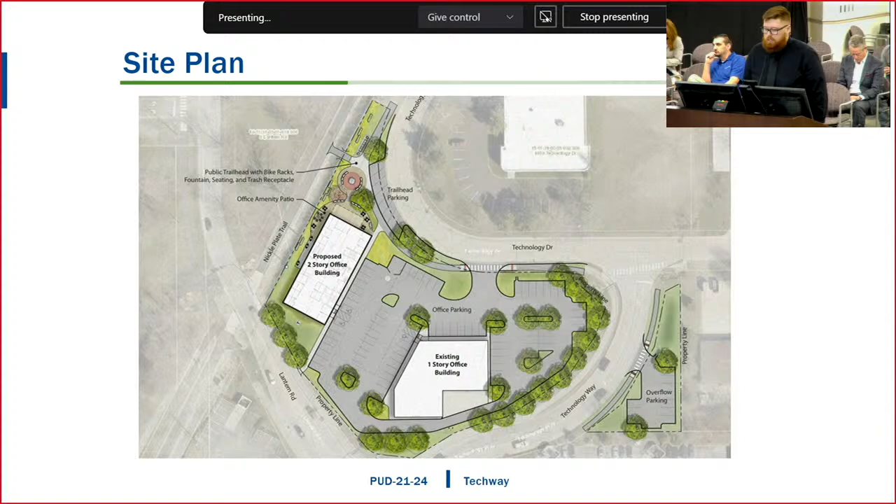The building that was approved has four-sided architecture, including brick veneer, brick header, and brick soldier cornice on all sides. The windows have either a metal eyebrow, cast stone headers, brick headers, and/or a metal sunshade. The base of the building is a cast stone water table. The windows are all either single or double wide storefront glazed warehouse style windows, and all HVAC units are screened on the roof with a metal panel RTU screen. The parapet also includes a stepped brick band. The project will include a trailhead location along the Nickel Plate Trail and signage prominently along Lantern Road.

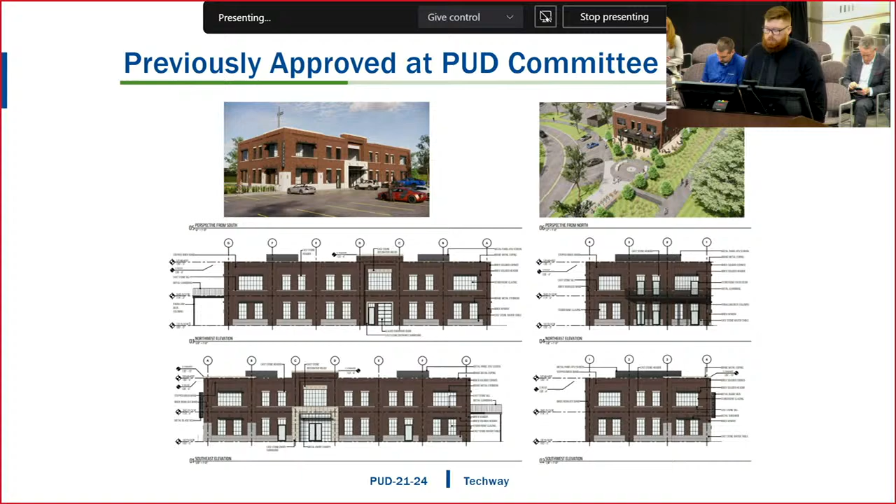Tonight the committee is reviewing the existing building on the site. The petitioner took feedback from the January meeting and worked with staff on new elevations. The petitioner would paint the existing brick a stone color similar to the proposed cast stone for the 14,000 square foot building. They will repair the existing EIFS and add some details in cornice, also painting the EIFS the same stone color — what appears white on the concept.

New brick, the same brick proposed for the two-story building, would be used around all the entrances and the featured window facing Lantern Commercial. They would also use metal canopies, headers, and coping similar to features on the other building. They would add an outdoor trellis patio facing Technology Way, with new rear doors and a blade sign on the corner, similar in nature to the existing building already approved.

This request meets all applicable zoning requirements of the Northeast Commerce Park and is fitting with the intent of the Certified Technology Park. Staff has worked with the petitioner through the TAC process and believes they will continue to work together. Staff recommends approval. The petitioner is also here to answer any questions.

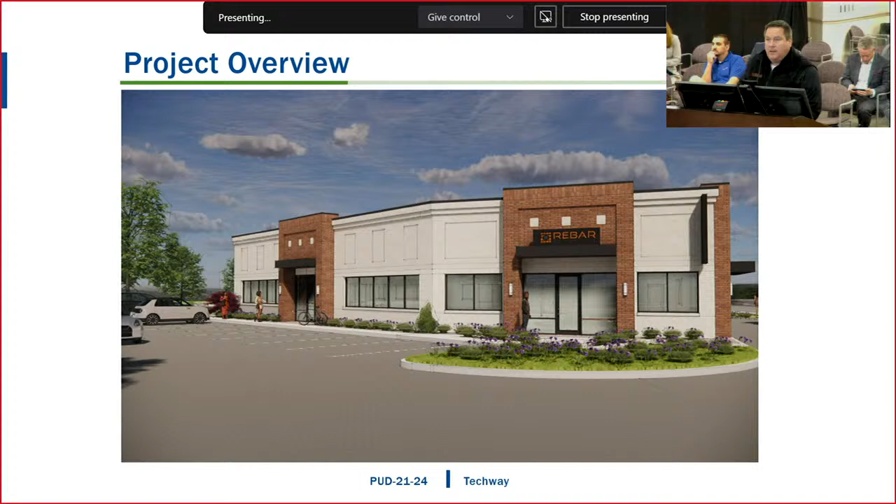Correct. So I just think it may add some - I don't know what the rest of the committee thinks, but I like maybe the duality of colors there that gives a little pop, because you're facing out to a prominent intersection now, with the modern age of building, and you're looking off that way. I just think it may give it a little extra, and hopefully the paint won't put you over budget, Shelby.

No, I agree. I think that'd be a good change.

Sean: I actually think it looks okay without the paint change. I think with the paint change it may get a little busy, so if there is a change, it's gonna have to be pretty minimal so it doesn't look very busy.

I do think this is much improved on what you had before. I think the one view that showed the back of the building facing Technology Way - the only comment I'd have there is it'd be nice if there was something done, because you've got such a long mass of that kind of limestone painted, which I think is block now, right?

Is that block currently, or is it half EIFS now? Brick, okay, then changes to EIFS.

If maybe you brought those metal canopies over those new punched openings, something like that, just to break up that side a little bit - because it is so long and flat along there, and it's pretty prominent now. You're talking about this section? Yeah, exactly.

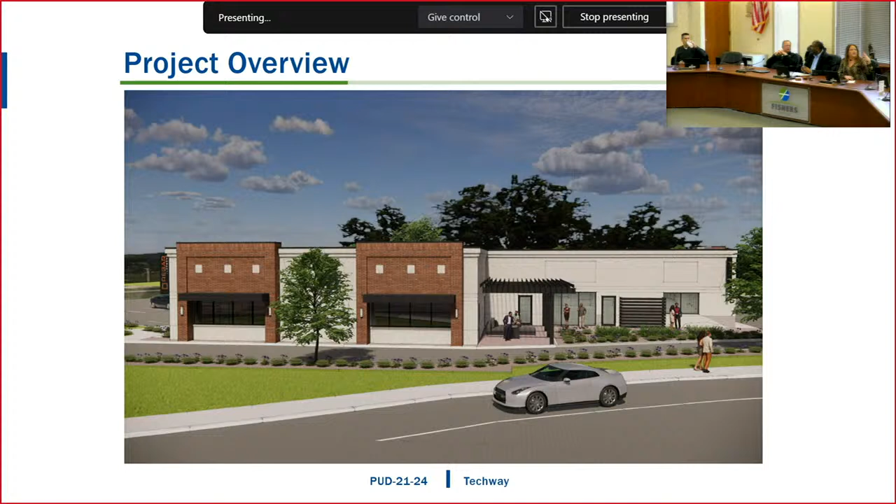Emily: I love that this committee has similar opinions. I'm sorry Pete, but I am gonna disagree with the change in color on the front. I actually like the clean look, but I definitely think that bringing that pergola, that canopy, over even further will really pull that back in together. I don't know how feasible it is.

I'm not in architecture or anything like that, but I do think that will really kind of bring it all together in the back. I like it a lot better.

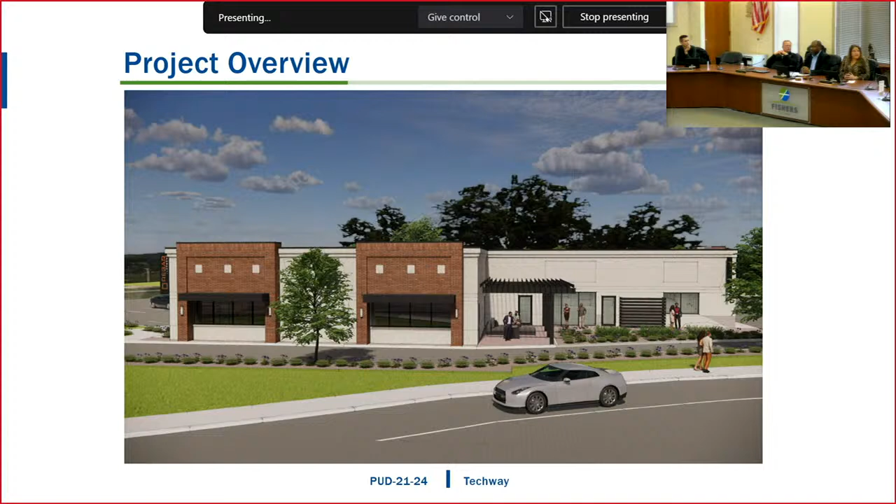I do think this is absolutely one of the first things you see coming into this tech park, right? So I would have liked to have seen something a little more significant, but I think it's much better than what we had before. So, yeah, that's my commentary. Thank you.

If there's no other questions, I would entertain a motion. I'm not married to making the color change, I just want whatever we think is gonna work. So I'll make a motion to approve with the stated items that Sean talked about on the rear of the building. I don't know if you can extend that canopy out any further.

I think you're gonna get encroachment on the landscape is what I saw. Emily, I think that would look good, but I think we're gonna encroach on some of that landscaping, so I think putting the overhangs, or canopies as you referred to them, maybe over there would be nice. So I'll make a motion to approve on that basis.

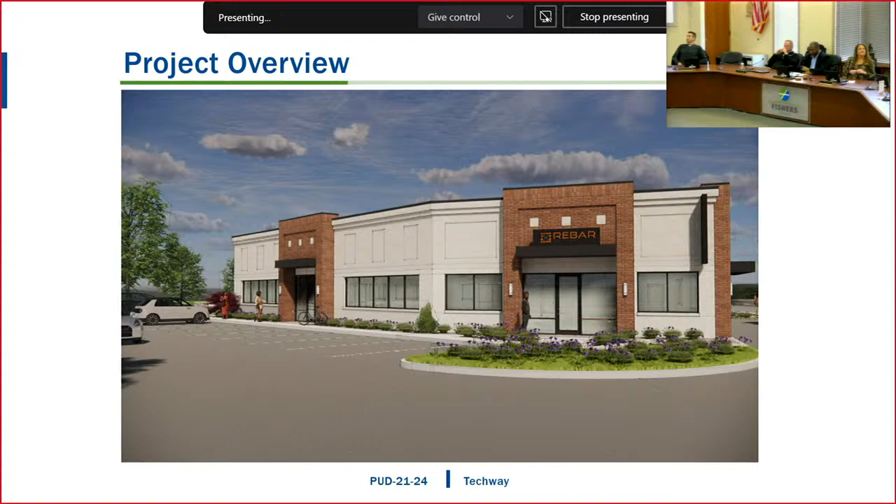Next matter on the agenda is PUD-21-25, the Courtyards of Fishers PUD. Faegre Drinker, on behalf of Epcon Communities, is requesting approval of the architecture and site design for a 50 single-family home development known as the Courtyards of Fishers PUD. The property is generally located northwest of the intersection of Southeastern Parkway and 113th Street.

And we have the staff here. I don't think we have Jonah, we have Ross again. Yes, Jonah is out today, so I'm taking his place for his two items. Thank you, President. Again, Ross Hillary, City of Fishers Planning and Zoning.

Before you tonight is PUD 21-25, which is the Courtyards of Fishers PUD. They are seeking architectural elevation and site design approval. Petitioner is Faegre Drinker on behalf of EPCON. The scope of the project is the approval of a site plan and architecture for an age-targeted single-family subdivision. The project includes 50 lots on 22 acres. The current zoning is R2, and the existing land use is currently vacant.

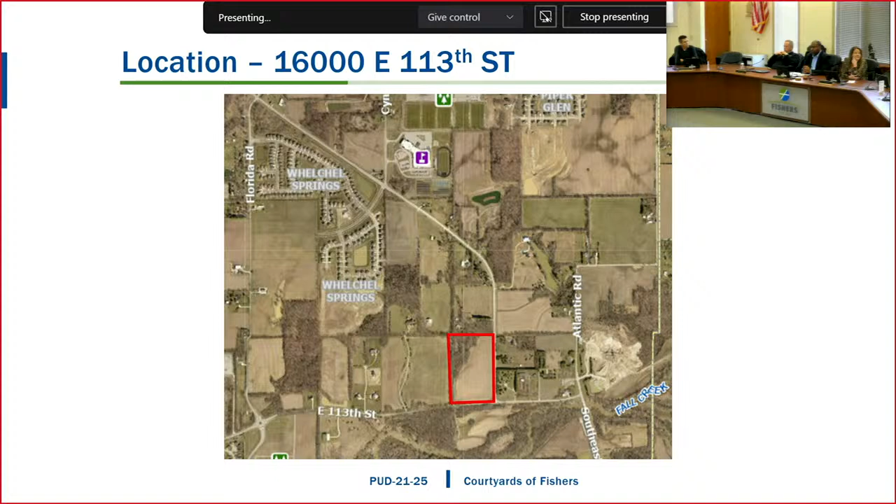The location is along East 113th Street and Southeastern Parkway at 16000 East 113th Street. That's the further location view.

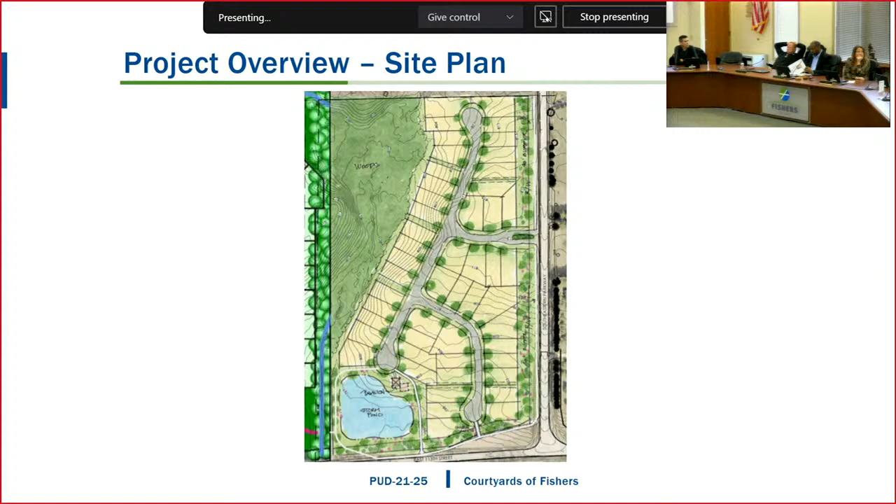Something really unique about this particular project is they are utilizing their side yards much more than their backyards. So the backyard along with the front yard will be treated more as common area, maintained by the HOA, but the residents will be utilizing their side yards.

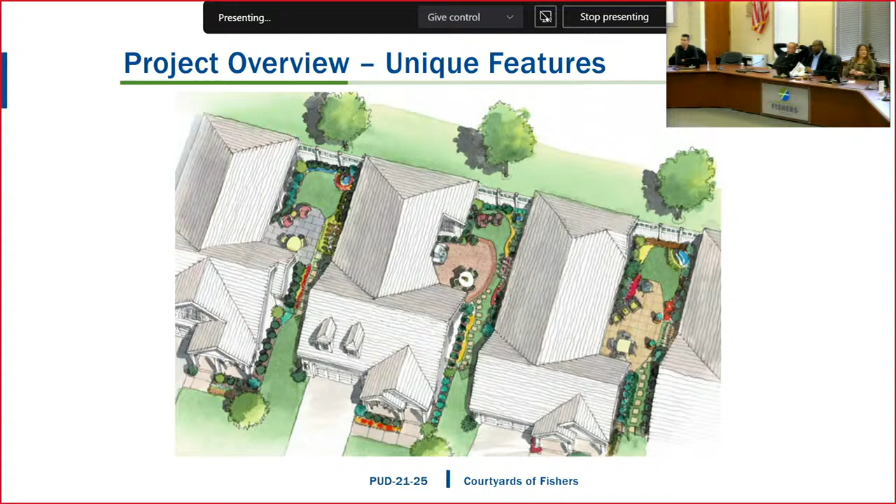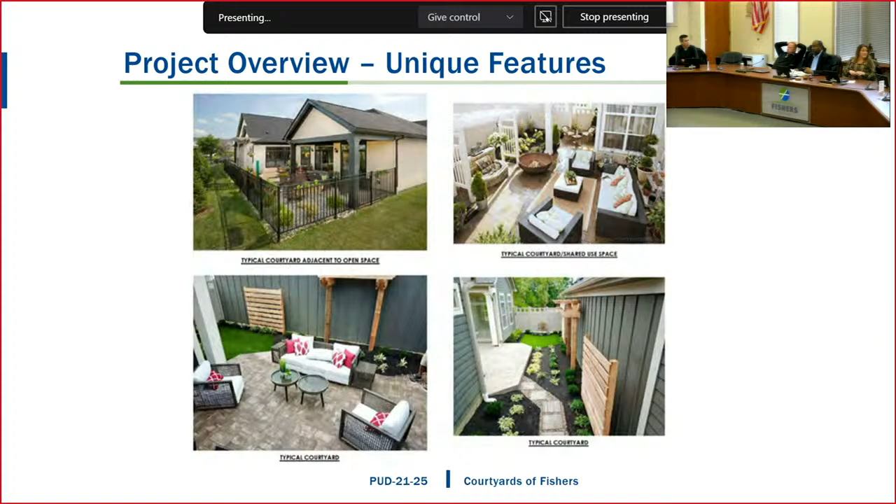Here are a couple of the unique features included in the PUD attachment. Again, you'll see a typical courtyard adjacent to open space and how they're utilizing those side yards, which is different than most subdivisions. We are approving some elevations tonight.

Staff does believe that these meet all minimum requirements set forth in the UDO as part of that PUD. The elevations tonight that you are approving are Promenade 3, which has 6 different elevations. The majority of the front porches are closer to the road than the garage, which is one standard we enjoyed. There's also the Provenance elevation, with 5 elevations, and Palazzo, with 8 elevations, all a little different but included under that same elevation.

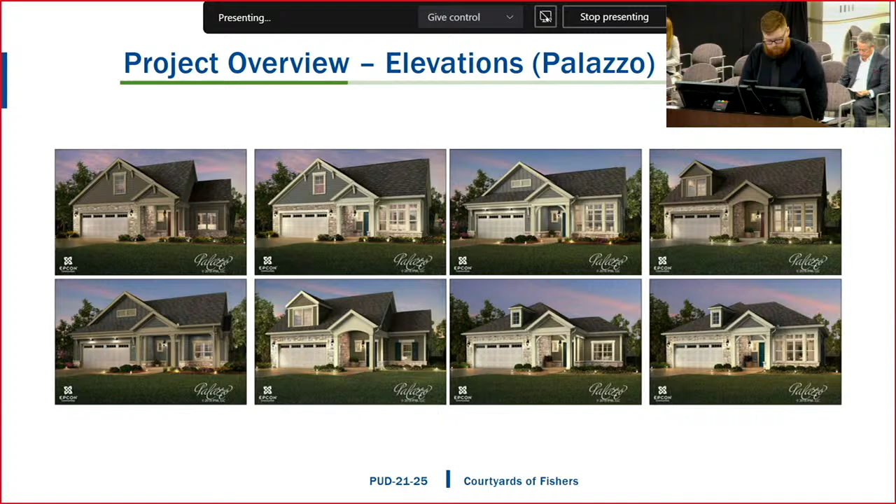Architectural features to note include reverse gable, varied cornice, corner molding, decorative entryways, multiple roof planes, decorative window casings, and roofline brackets. One thing I wanted to highlight again is the use of those side yards, which typically requires this to be a PUD and is not very easy to fit into our regular zoning code. With that, staff recommends approval of PUD 21-25 as presented. The petitioner is also here to answer any questions.

Thanks, Ross. We'll hear from the petitioner now.

For the record, my name is Steve Hardin. I'm a partner in the law firm of Faegre Drinker, resident here in the City of Fishers. I'm pleased to be representing EPCON Communities on this project. Brooks Longfellow is here with me as well, and he'll come to the podium in case you have any questions on the architecture.

As Ross mentioned, this is a little unusual for Fishers. We have a project that's been approved in Carmel, and there's one underway in Westfield as well. EPCON, unlike maybe some other developers or builders we've seen before, all they do is senior housing—it's all age restricted. I'll let Brooks introduce a little bit about the background, how many years in business, how they focus solely on the senior market, and why this is called the Courtyards of Fishers, because of the courtyard plan, which is kind of a unique aspect of it. So Brooks, maybe just take a few minutes, explain the concept, and then we'll open it up for any questions on the architecture.

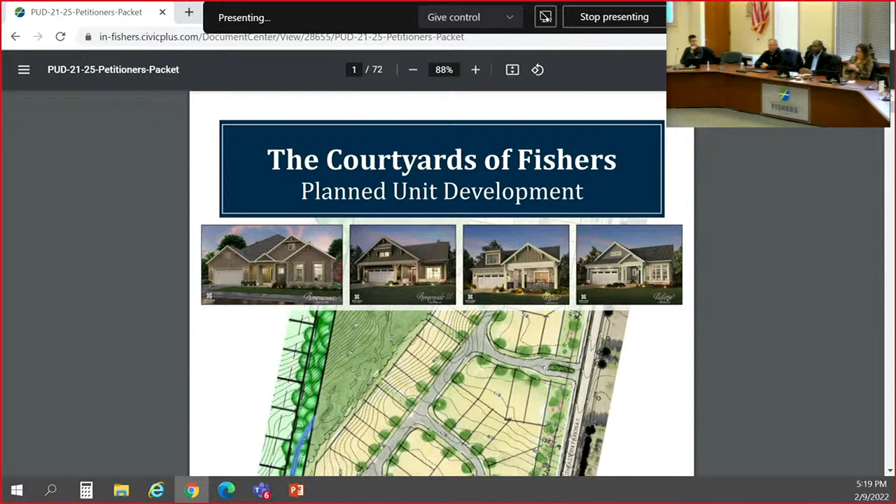The only elevation I have a question with was the first grouping of elevations - you're showing the garage doors with no windows. I'm big on some sort of decorative garage door, putting windows in there. You have them in all the rest of them. I don't think it would be a big ask to put them there or do something to give me some detail, just not a flat panel garage door in that first group.

We do offer an option to each one of our clients on every single floor plan and elevation to add windows to that garage door. I'm a big fan of the windows or something on the garage door. We can include it if you'd like. I just think it gives a decent look to the front rather than a big flat white garage, in my opinion.

By the way, you'd asked about the southeastern landscaping. We meant to talk about that more at the Plan Commission meeting tonight. We did have a meeting with the neighbors, inviting anybody who wanted to talk about the project. A couple wanted to, including the neighbor right across the street, Mr. Sunderman, you might remember him from last time. They reviewed everything, and we asked them to tell us if there was anything they wanted to change. They had some requested changes for the landscaping, so we red-lined it in the PUD ordinance and made the change they asked for. They're appreciative of that.

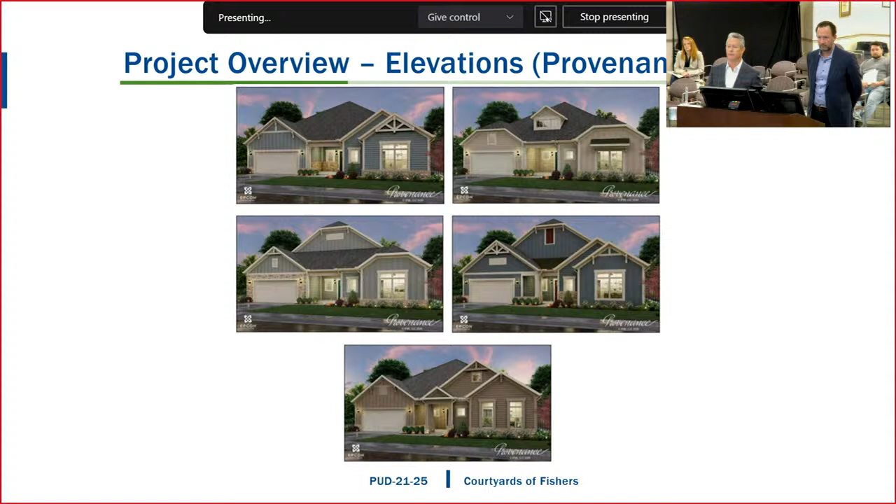Awesome, thank you. Any other comments from board members?

I just have one quick comment. I am so thankful that you guys are filling a need. And that's all I'm gonna say.

Thank you. I have a question, just because I haven't experienced one of these in person. A couple of the photos showed kind of the side yard concept, which I think is a great idea. Is there uniformity to the fences from lot to lot, so that mine is the same as my neighbor's, so there's consistency? I don't want a white picket fence next to a wrought iron fence. I assume it's consistent? I can pull up whichever exhibit you'd like.

This one? Will this magically change, or—oh, wait a minute. Yeah, there it goes, there it is. It does magically change.

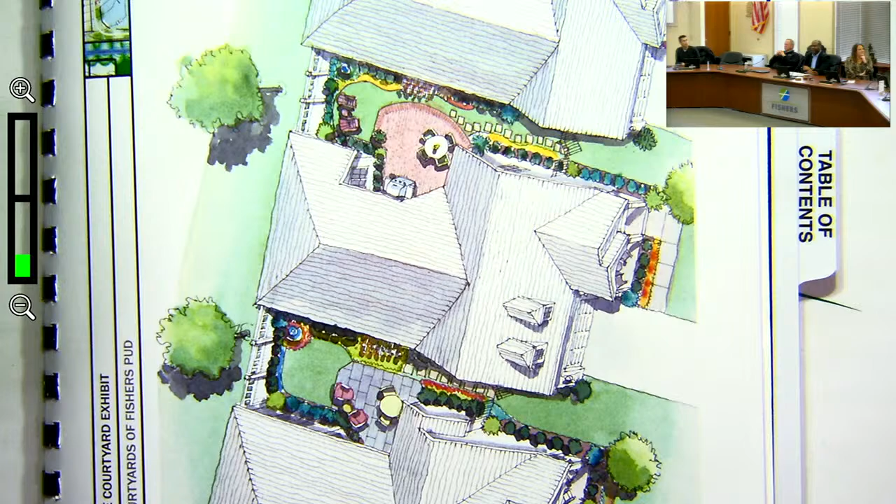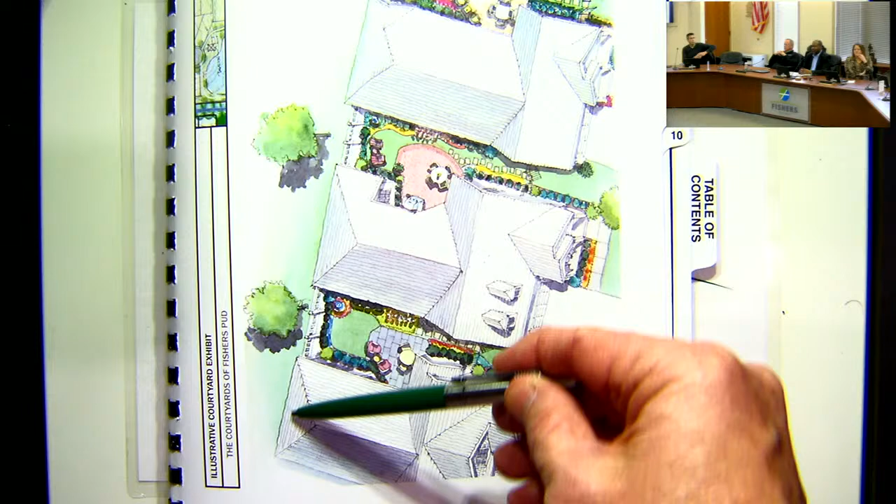One of the things we do is something a little unique in how we set the homes on the lot. If everything was pushed to the front setback, the backs of the homes would all vary. But if you look at this illustration, all the rears are lined up. We put everything at the rear setback so that all the rear facades are in a line, and those fences can connect uniformly across the back—the same fence across the entire side.

And then the other question I had is, between the lots—for example, the one I'm looking at in the middle—my side yard would be to the right, if I'm looking correctly. So if you're on the home that Steve had his pen on, your side yard is to the right. And then the one to the right of that, what is the configuration of that floor plan relative to windows and things like that, looking out at that space?

Great question. There are windows on the left side of the home in this illustration, but they are all transoms, held up high. So they let natural light into the individual's home, but they aren't in a spot where they can see out into the neighbor's outdoor space. It's really kind of two-sided privacy—if I'm sitting outside, I don't want someone seeing me, but if I'm inside, I also don't want someone looking into my house. Just wanted to make sure that was addressed.

Good job. I guess I have one question out of curiosity. I like the concept that residents can walk from their garage into their house with no step up. Curious regarding the bathrooms, in terms of the showers—there's no step up or bathtub. Any drainage or water issues or flowage regarding that?

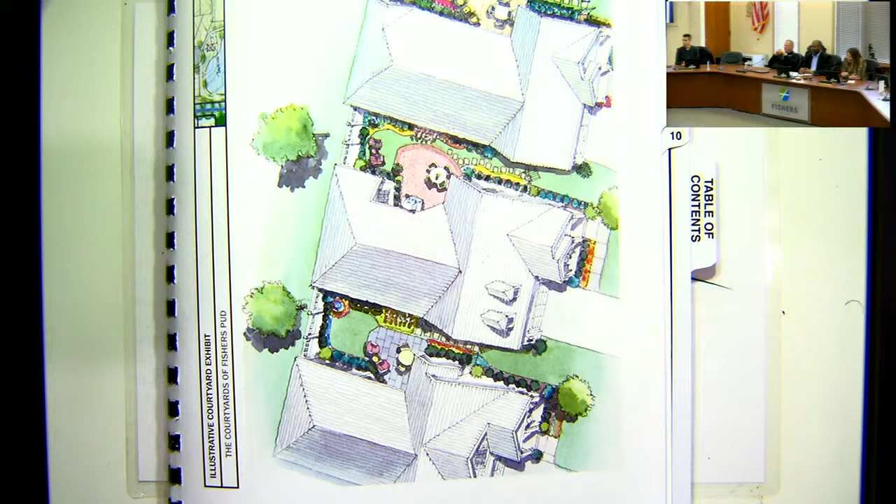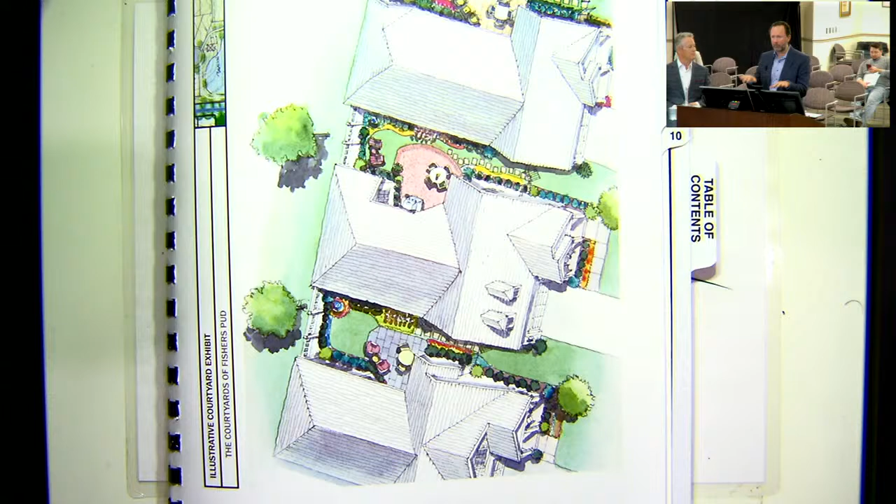No. What we do is drop the shower, so the floor of the shower is actually recessed from the level of the floor of the rest of the home, and all the plumbing's underneath the slab. So there aren't any drainage issues there—everything's sloped appropriately to that center drain. Thank you.

I would entertain a motion. I'll make a motion to approve with the garage door window addition. We have a motion. Do we have a second? We have a second. Roll call, please.

Mr. Stevenson? Yes. Ms. Bowman? Yes. Mr. Curran? Yes. Mr. Peterson? Yes. The motion carries. Thank you. Thank you very much.

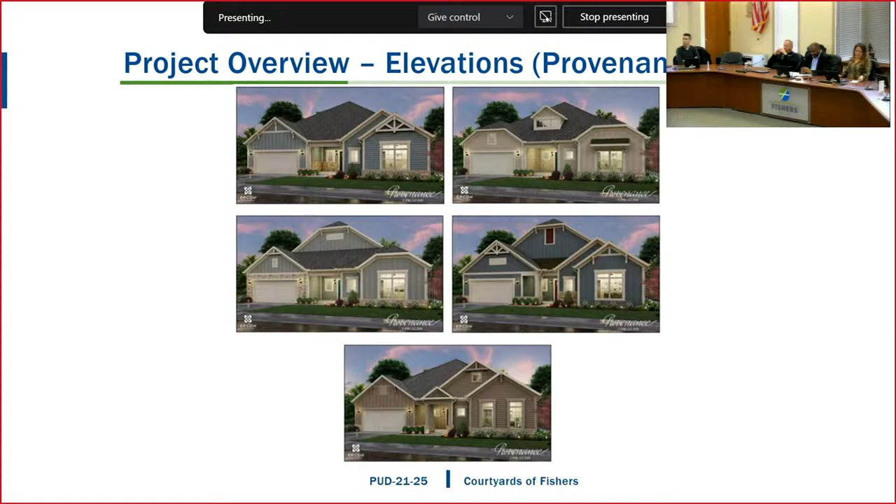Next item on the agenda is PUD-21-26, Anytime Fitness at Geist Crossing. Seth Nycum with Roger Ward Engineering is requesting approval of the architecture and site design of a one-lot, three-unit commercial tenant development within the Southeast Fishers PUD. The property is generally located east of Olio Road and north of 96th Street. And we have Ross Hillary once again with the staff to present for us.

Thank you. Again, PUD 21-26, Ross Hillary, City of Fishers. Before you tonight is Anytime Fitness, seeking architectural and site design improvements. The petitioner is with Roger Ward Engineering, looking at a 3-tenant commercial space, approximately 0.86 acres. Currently PUD-M, Southeast Fishers, located near the intersection of 96 and Olio.

Here is an overview of the site plan. You'll see here how the building steps back. It is connecting both Visionworks Geist Crossing and a Cooper Tire structure right there, so it would be connecting these two buildings. Parking would go along both sides of that existing drive, and you'll see the building here on that site plan. Again, here's another rendering of that overall site plan.

Here's the elevations of the building. Elevations include fiber cement trim, natural stone, limestone, black storefront windows. They've also shown where signage would be located, but it's not part of the approval tonight. Also signage for the other two tenants located there. You'll see building elevations on all sides, including the masonry and Hardie plank.

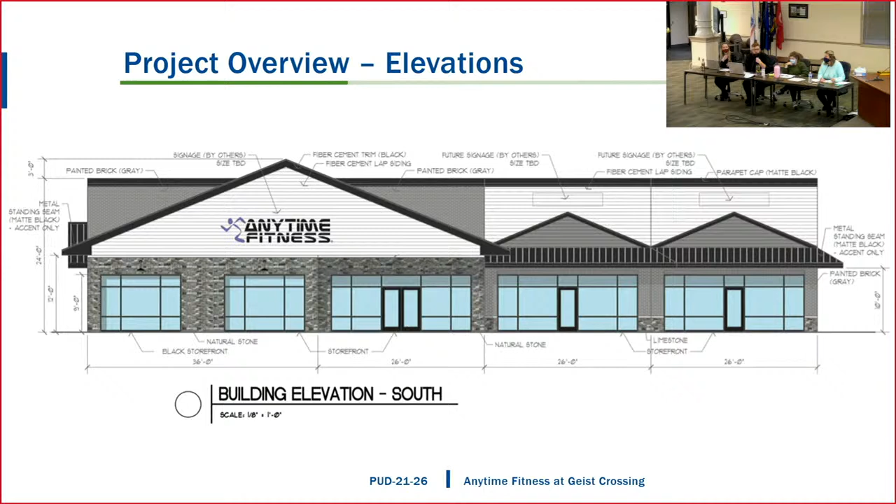Yeah, I would agree, and not to say it should look like another building, because I hate when people tell me that. But I think an example of a building that at least got a little bit closer to that in trying to match their adjacent buildings was the buildings along 116th Street between Hoosier Road and Brooks School, on the north side of the street. There's a couple—I think there's single tenant buildings that are much more residential in character, and then there's one that is multi-tenant.

Yep, well, I don't think that building is great, but I think it at least blends in with the other buildings a little bit better from a style standpoint. And that has a similar color—yes, it does—architecturally, a similar color palette, I think, to this building.

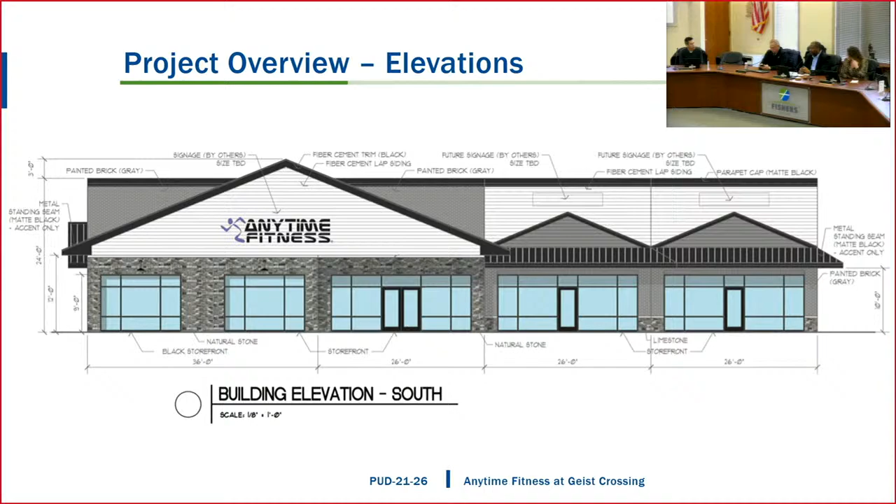Yeah, pull up the site plan again, if you would. Can we get to the site plan again? This is around the corner from my house.

So we're looking at the Neil Tire and Auto—that's the Cooper Tire, I think we're talking about, right? Isn't it called Neil Tire and Service, I think? Yes, Cooper Tire, right? Yeah.

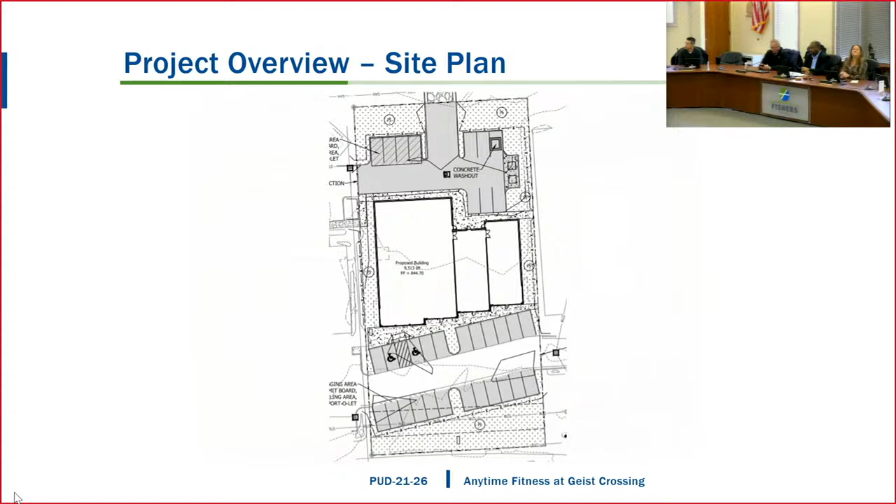So then to the west of that would be the vet—I got that right? It's north of this building, the vet clinic, but right west—oh, I see, west, north of that—I got it, yep. So directly to the west then is, what is that building there?

Visionworks? Visionworks, yeah. So it's not really adjacent, I mean there's a Global Self Storage unit just to the east, which in my opinion has always looked atrocious, but it's along that southern border. I don't really have any issues with the architecture there. I'm looking at it right now on Google Maps, and you've got a big retention pond, you've got the vet, you've got a parking lot.

I get what you guys are saying, and certainly along 116th Street, we were far closer adjacency to residential, where we were getting light questions and trash collection questions that we're not gonna get here. We're just not gonna get it. Just because everything around there, you've got a strip mall out in front, the Shell station, the Vision Center, and the tire shop. Right now, it's a dirt lot.

That whole section down there, I actually think it may add some character to get something put in there, quite frankly, and make it look better than what it is now, just from a sheer streetscape as you're going through. Obviously, there's a landscape plan in the parking lots, like we always do, and the lights are there too for the parking lots that we require. So I'm not necessarily having an issue with the location, and it is literally around the corner from my house.

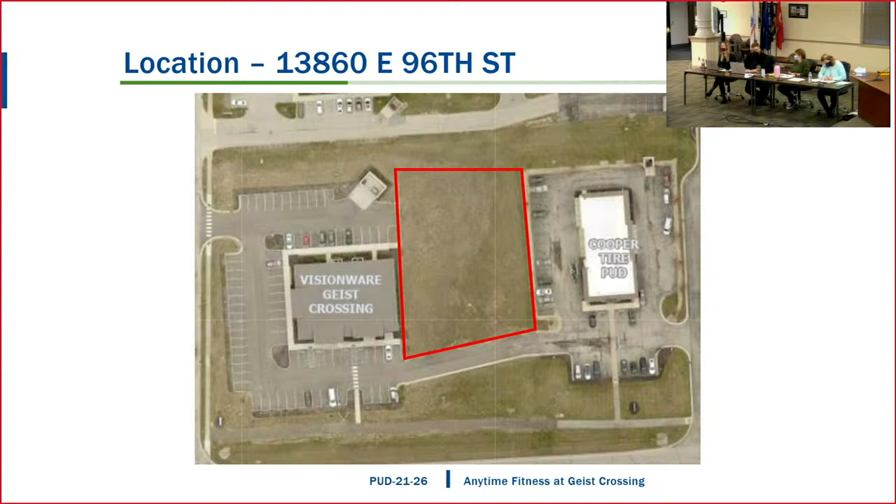I move to carry this to the next meeting. Okay, to continue it? Yes. That's the motion on the table? I'll second that motion. We have a motion and a second. Roll call, please. Mr. Peterson? Yes. Mr. Curran? Yes. Ms. Bowman? Yes.

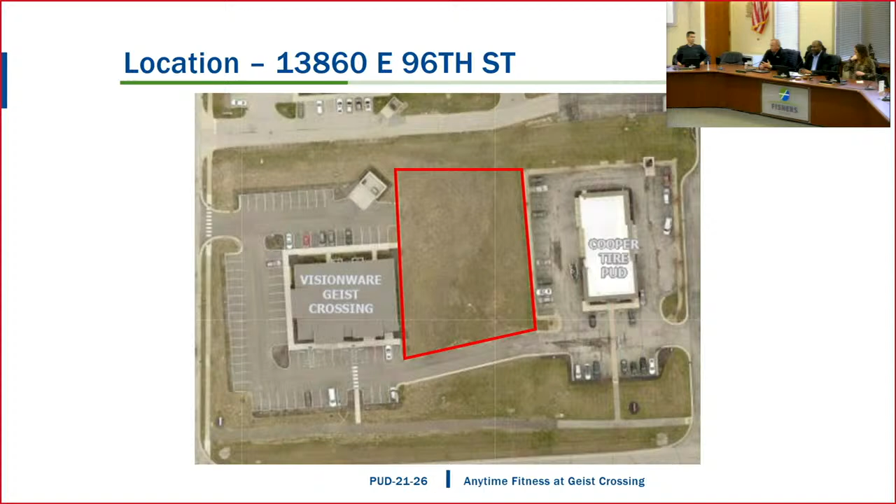Mr. Stevenson? Yes. So, but I want to make sure I give the petitioner at least some vision here. And I am not an architect, I just work for an architect, okay? So I understand budget questions that you have, and I understand what's going on in the marketplace. I'm not really sure how you take essentially what is an industrial building as a fitness center, because that's what they are, okay? They're boxes that they put equipment in, and try to make that backside more architecturally nuanced so that it's residential in flavor. Are we talking about adding the same pitch gable roof which we see up front and doing that out back? Is that what we're requesting? I'm not really sure what that does to your budget. I'm sure it crushes it, but I want to at least give some sort of direction. We're just talking about different articulations. Are we talking about putting a canopy out? I don't know. So I want to try to give them at least something that they can go back to their client with and say, ideas that may cost them a little bit more money but won't kill them. I understand the concerns that we have for sure. I'm just not really sure the solution if we have any here to help.

So, anybody have ideas? My architect friend over here, would say, architect has some opinions, but I have an opinion too, sure. I think also maybe some renderings that show a little bit more of the 3D elements of the building will help. It's very tonal, which is good because the whole building is tonal, but a different color, a different material, a different something to give it just a bit more interest back there. But I think Sean's opinions are going to be stronger than mine.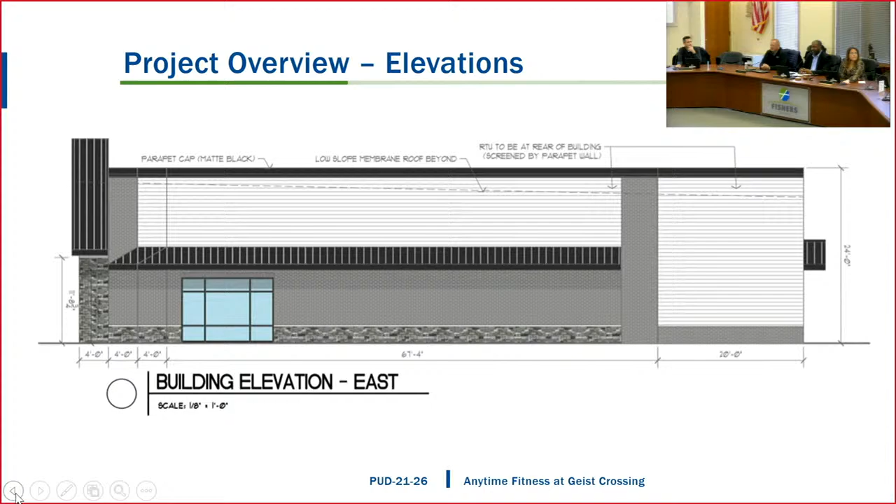The sides are not the concern. Sides and front are mostly acceptable, correct? It's just really that north elevation that's the main concern. Correct. Yes, but this updated west elevation, I'm okay with that one. The one we got originally, I was not okay with.

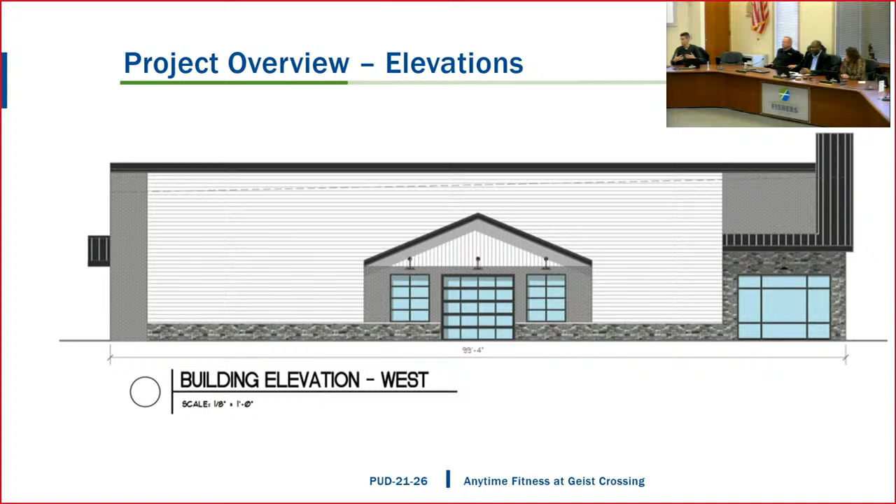I think it looks like a box that has stuff added to it, and I would expand on that, that's all. That elevation to me looks very flat, and it looks like a canopy's been tacked onto it. It doesn't read three-dimensional to me. So if it is three-dimensional along there, that's great, but it doesn't read that way. It reads like a flat plane with a canopy added in order to meet the requirements of PUD.

Yeah, Revit will take care of that.

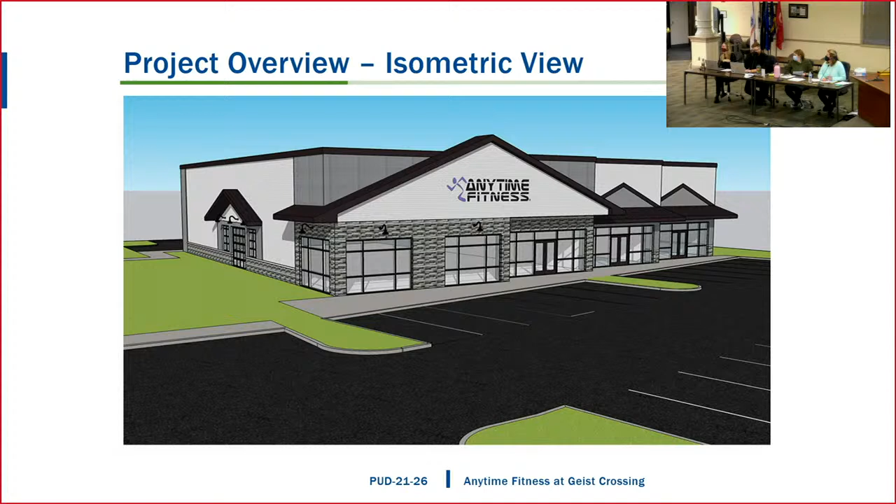Staff can share with you some other multi-tenant buildings that Sean was referencing, on 116th Street, just to give you an idea of that. That would be something great, that would be acceptable. Thank you, thank you very much.

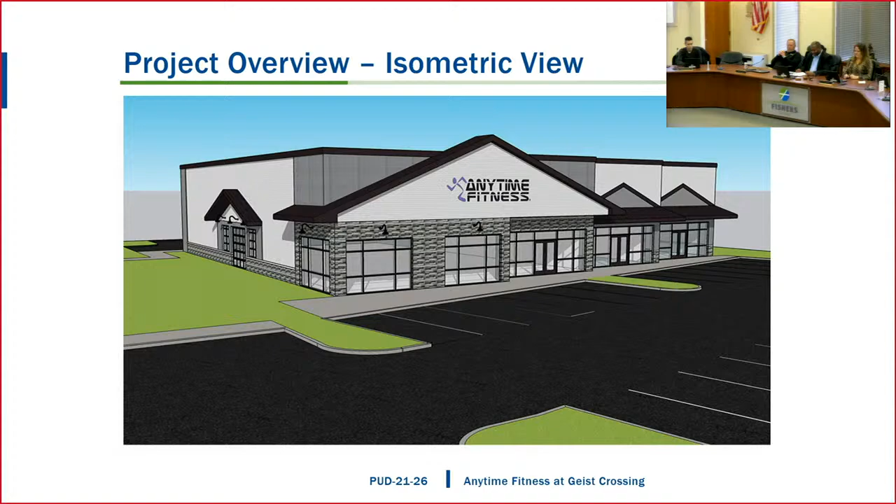PUD-22-1, Alderman Auto, Seth Nykum of Roger Ward Engineering is requesting PUD committee approval for a commercial building for car servicing, 6,600 square feet at Alderman Auto. The current zoning is PUD-C, Fishers Trade Center. The site is located southwest of 141st Street and State Road 37.

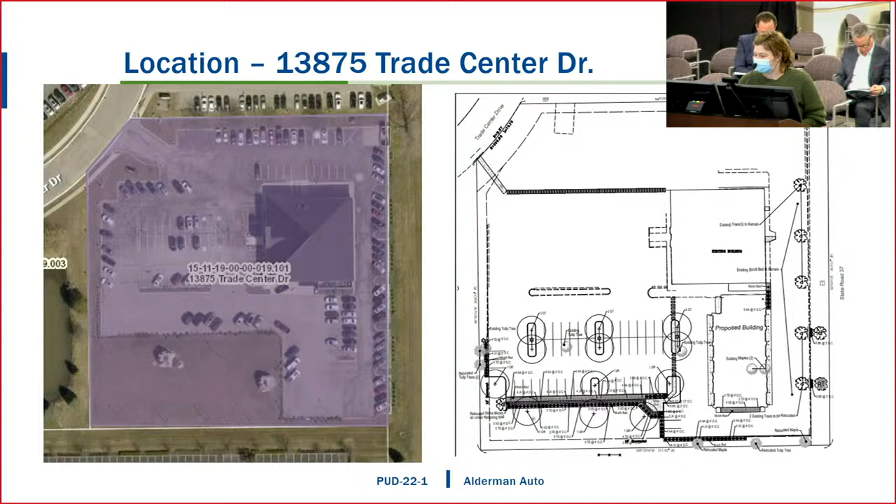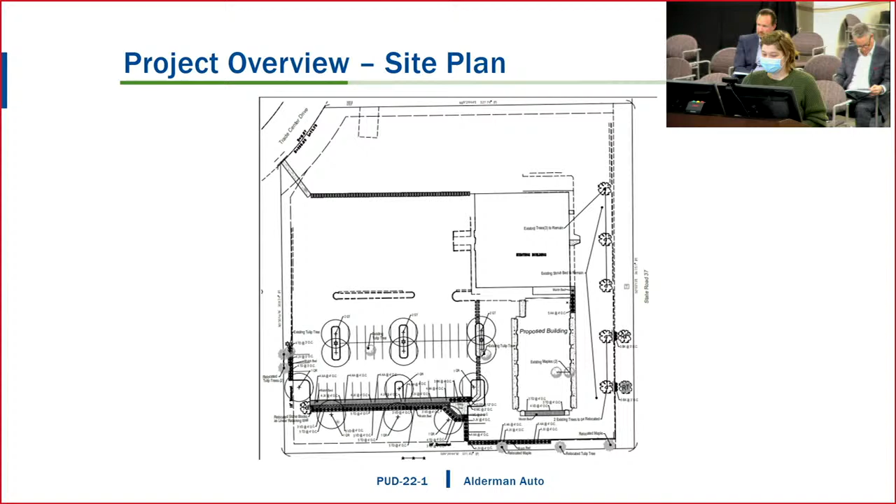Once again, here is the site plan. The new parking lot will be screened with landscaping, and the additional parking does meet the UDO requirements.

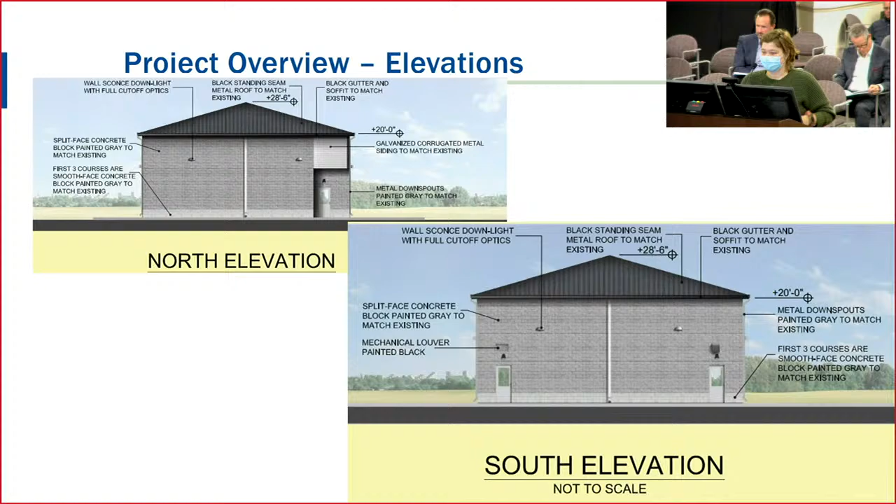Here are the elevations of the proposed structure, this is the north and south elevation. As you can see, the brick is a similar or the same color to the primary structure, with a subtle difference in the coloration there. The north and south elevation is what is facing the primary structure and the property to the south, not what is facing the public right-of-way.

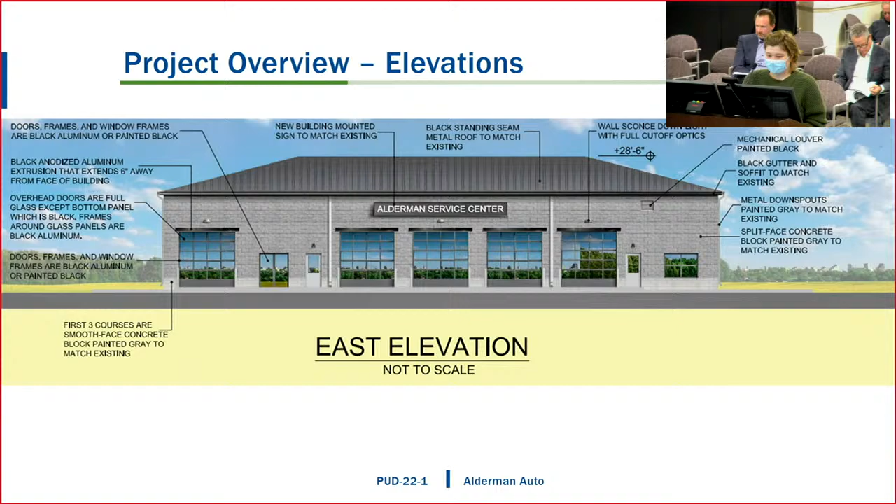Staff has asked if the overhangs could be extended to 12 inches to meet the UDO requirements for modulation. Here's the west elevation. As you can see, the new Alderman service sign does have that corrugated metal in order to match the primary structure, so it'll fit well with what is existing. This also has the aluminum awnings and the glass doors.

Staff does recommend approval of the PUD. We have had suggestions for the following for the north and south elevations: the addition of a paint stripe or material change along the north and south elevation. We have also requested that the aluminum awnings be extended to 12 inches instead of 6 inches as proposed to meet the requirements of the architectural guidelines referring to modulation in the UDO. We have also potentially suggested working with a local artist to place a mural on the north or south elevation, similar to a Jiffy Lube style, instead of a paint stripe.

Thank you. We'll hear from the petitioner.

Good evening, everyone. I'm Graham Marshall with Roger Ward Engineering. I'm representing Mike Belay from Belay Architects as well as Brittany Construction. I don't have anything to add, but I'm here to answer any questions you might have. I will note I am the engineer on this project and not the architect, so I'm not sure I'll be able to answer all of them, but I'll do my best.

Thank you. Board members? Again, I think it's a good use for it. I love the metal roof, so I don't have any architecture questions for you. I also appreciate the fact that we're walling up along the parking areas on 37.

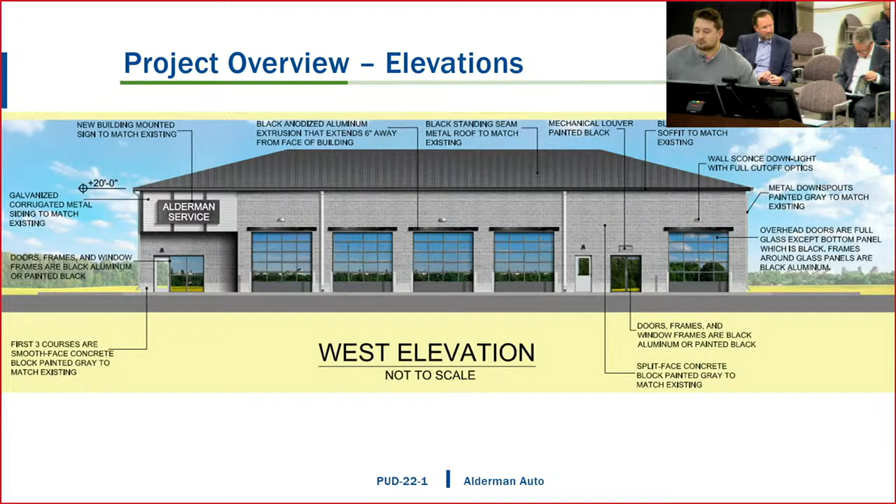I think the staff comments to add those 3 items, if I counted them right. Yeah, 1, 2, they're 3. Just suggestions really for you guys, so I would say we're not recommending all of those, but maybe the first 2 — the addition of a paint stripe and then the aluminum awnings, just having those project out a little bit. I think all those are really good suggestions, quite frankly.

I like the mural thing, the Jiffy Lube mural thing on either side. I think that looks great, particularly along 37, to differentiate ourselves from our neighbors to the south and north. All in all, I think it's a pretty good use for this particular project, along with those comments from staff. I personally am an artist working in Indianapolis, and I think that kind of opportunity would actually be great, and I think you would get a really good response. The owner would get a really good response if they were to pursue that, so I definitely think that's something they should do. Thank you.

I have one question, if you could bring up the site plan. So there's garage doors on both east and west, correct? Is there a drive along the east side as well, or is it a little hard to tell from the site plan? Yes, there's a showroom. There's parking spaces for the cars that are being sold as well as a drive on.

Okay, perfect. I do agree. I think this is a great opportunity to reimagine the site, obviously, when Ben and Ari's went out. And I think that orienting this on the east side of the property with the State Road 37 work being done, and focusing more of the vehicle orientation to the west, is great.

No other comments. I do agree the 12-inch projection of the awnings would be a great idea. And the mural, I guess I would prefer the mural over a stripe. And I would suggest it go on the south side, not the north side, because it looks like you're pretty close to the building to the north, so I don't think it's going to get a whole lot of visibility to the north. So if that is going to be done, I think it should go on the south side.

Nothing else. Thanks, John. Entertain a motion? I'll make a motion to approve with the staff recommendations, and I like Sean's idea — mural to the south, stripe to the north. I like the succinctness. We have a motion. Do we have a second? I'll second. We have a motion and a second. Roll call, please.

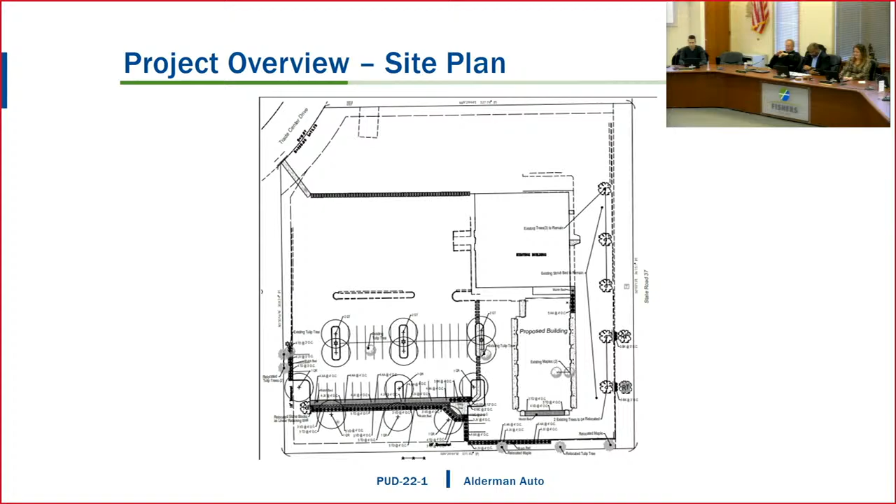Dr. Mike Timko of Kimley Horn and Associates is the project engineer, and we have Bree King once again for the staff to present. Thank you.

We are requesting approval of elevations and site design for the Silver Collection at Saxony, which is a 4-apartment building complex, 362 total units, detached garages, mailroom, and a clubhouse. They have already obtained Saxony board approval. You can see this will be located in Saxony.

Here's the site plan. There is one minor change since this was first put in the staff report: the proposed garages directly on the north end will be the garages with the higher architecture. I'll bring this up later when I have the elevations, but it's important to note that those higher visibility garages will have the elevated architecture.

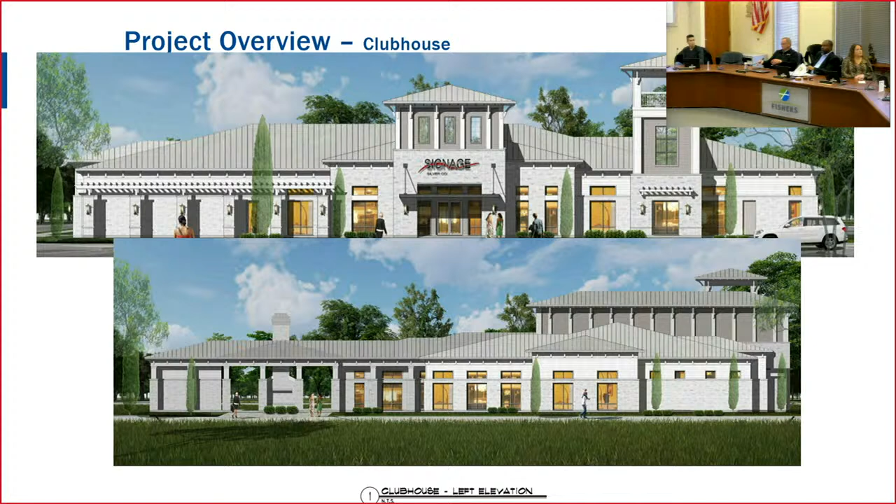This is the clubhouse. I just want to point out that signage will require a sign permit and will be reviewed to the PUD and UDO standards at that time. There is quite a bit of roofline modulation, as well as architectural features in the eaves. You can see the color scheme is similar to the apartment buildings, and there is a pergola structure.

Another view of the clubhouse here, you can just see those large windows are definitely adding interest.

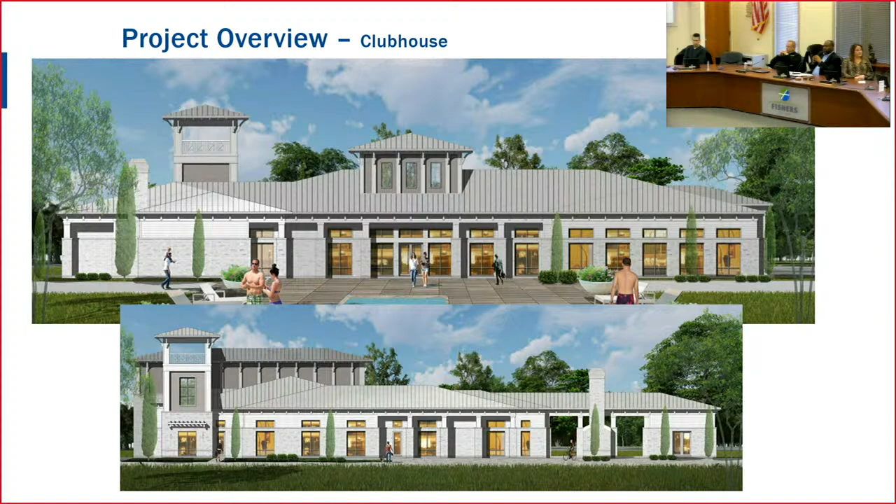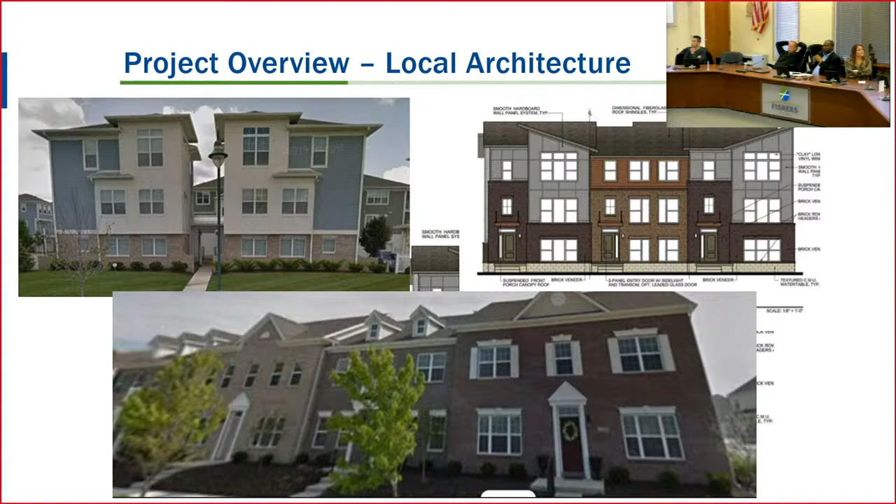Staff does recommend approval of PUD 22-2 with the additional requirements of the Saxony Review Board that were already shown on the site plan, and response to all TAC comments.

Thank you. And I do just want to mention that we have the petitioners, they are from Florida. They flew in last Wednesday and then were able to get out right before the snowstorm hit, so we allowed them to call in via Teams. They are virtual. We typically don't do that for petitioners, but in this case we made an exception. Just wanted to note that they are with us virtually via Teams. Thank you, and that is appropriate. Okay.

Will we hear from them? Yeah, yes, we also have the project engineer. I don't know if you guys have a presentation prepared or have anything additional to say?

Good evening, for the record my name is Alan Fetahagic, civil engineer with Kimley Horn, representing Silver Companies. We have on the call, for some reason I couldn't get on Teams but they were able to call in. Also on the call will be Marko Brakovic, with Silver Companies, Senior Vice President, and Ryan Meeks with Meeks Architecture. We are very excited to bring this project to the city and here in front of you, and please let us know if you have any questions—between Marko, Ryan, and me, hopefully we can answer those. Thank you. Thank you.

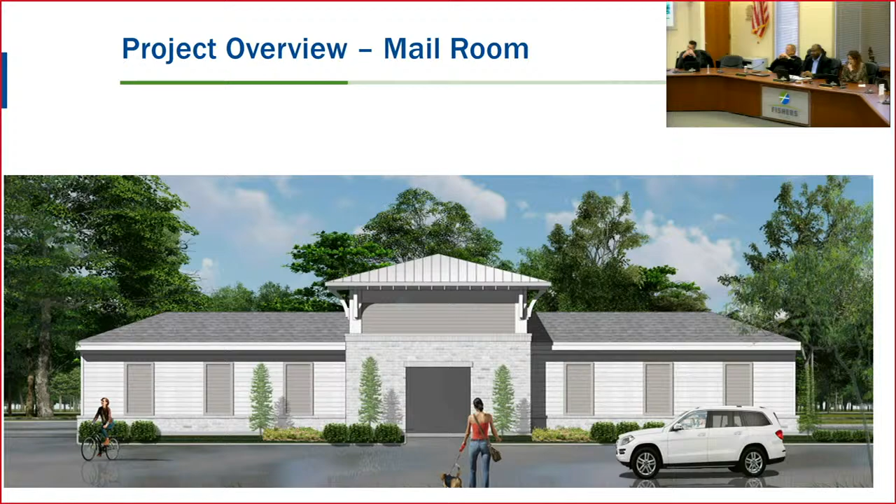I can explain that. This is Ryan Meeks, the architect on the project. These garage doors are facing internal to the development. If you look at the garages on the planned north side of the site, the side facing the public realm is not the garage doors, but the other side of the garages, which has decorative elements and roof line adjustments. The elevation previously shown is the internal elevation with the garage doors. So all parking is internal to this. The whole project was designed to have a nice urban edge with pedestrian access to the sidewalk and clean urban architecture around the perimeter, keeping all parking internal to the development. Does that answer your question?

Yeah, that does. So the towers you see are essentially on the north side of the garage. That's correct. Perfect, that answered my question. I don't have any other comments.

I think it looks like a great project. I'm going to make a motion to approve. Second.

Thank you, this is Marco Brakovich. I just want to tell you that the Silver Companies is very excited to do this development in Fishers. We've spent a lot of time and effort with the architect in Holland to develop a project that we think you folks will be very pleased with once you see it completed.

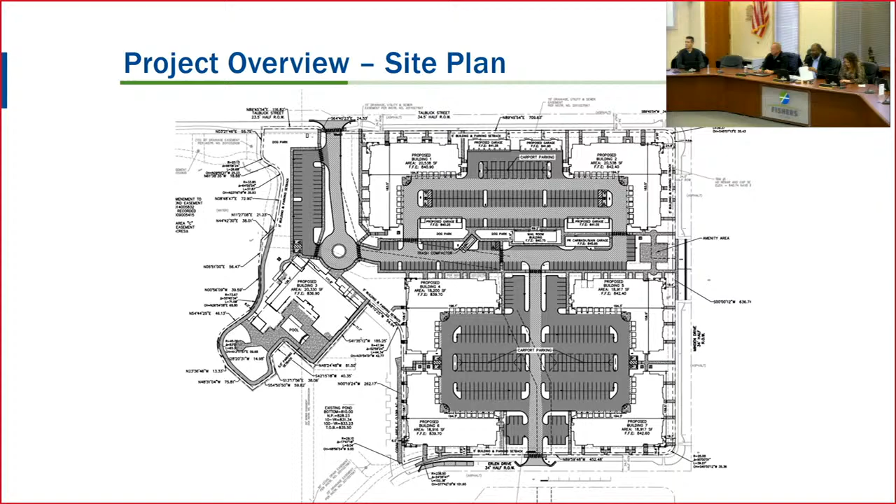Thank you guys for attending virtually. Thank you so much. Thank you. No, sounds good. We appreciate it. Thank you.

The last item on the agenda is PUD-21-29, Parkside Towns at Saxony, Section 2. Kevin Sumner of Weihe Engineering on behalf of Lennar is requesting PUD committee approval for a 17-lot townhome development. The current zoning is PUD Saxony. The subject site is located southeast of the intersection of 134th Street and Midden Drive, and Bree King is with us again for staff.

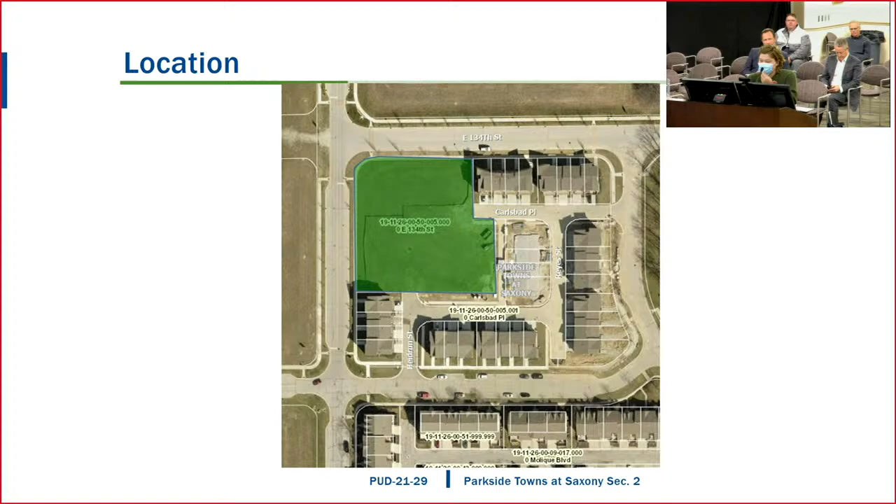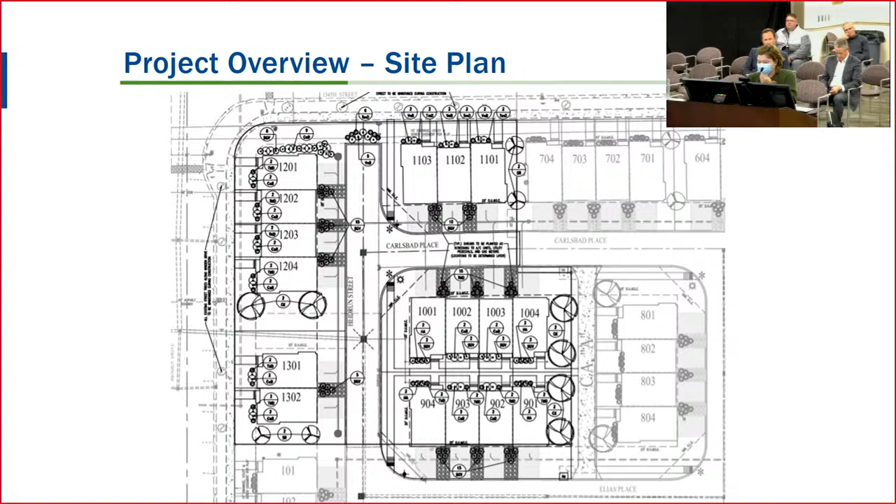Thank you, this one should be very easy. This is the second section of Parkside Towns at Saxony, including 17 townhome units. As you can see, it's just filling in the vacant portion that Section 1 left. Here's the site plan. The 17 new units' garages will once again face internally on the existing streets, and the external will be pedestrian oriented.

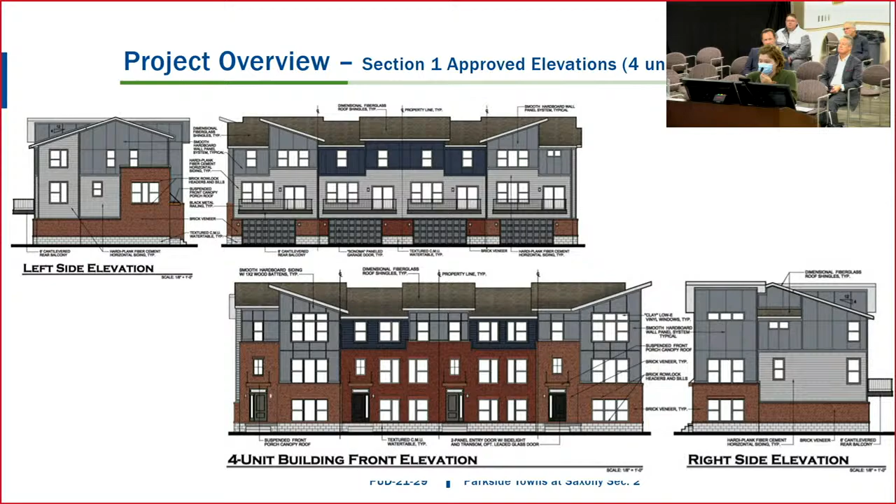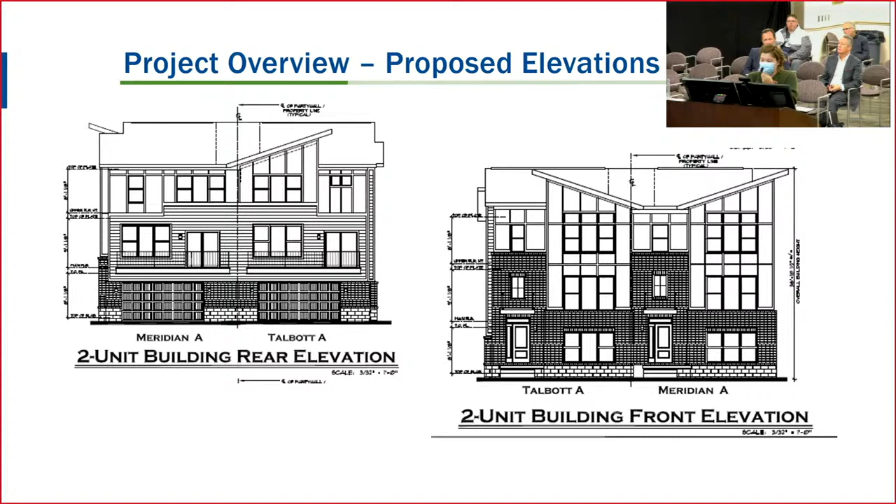Thank you, we'll hear from the petitioner. Yes, good evening, Tony Begata with Lennar Homes, 11555 North Meridian Street, Suite 400 in Carmel. I won't add anything else. It's just a continuation of what's already built, and we just want to keep going.

Thank you, Tony. Comments from the board? I'm going to make a motion to approve. I'll second. We have a motion and a second. Roll call please. Mr. Peterson? Yes. Mr. Curran? Yes. Ms. Bowman? Yes. Mr. Stevenson? Yes. The motion does carry.